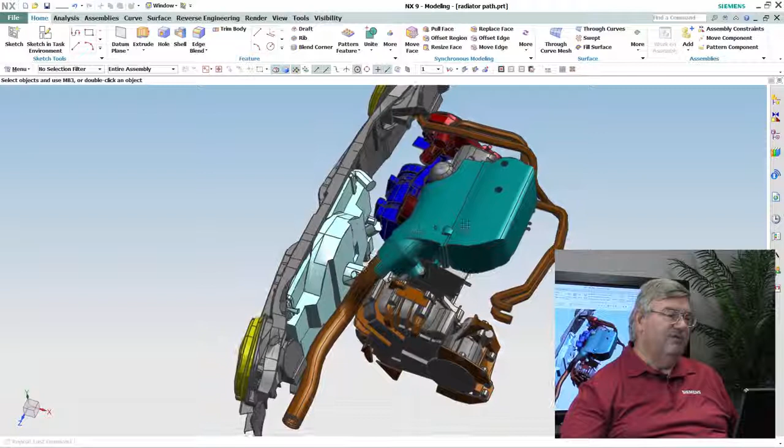Today we're going to talk about a little bit more complicated problem. What I have here is an engine compartment that we've designed, and there's a radiator in here, and we have to account for it as part of the design that eventually this car will be maintained, and one of the things that may be required is to replace the radiator. And so I want to be able to know whether I can get this radiator out of here easily.

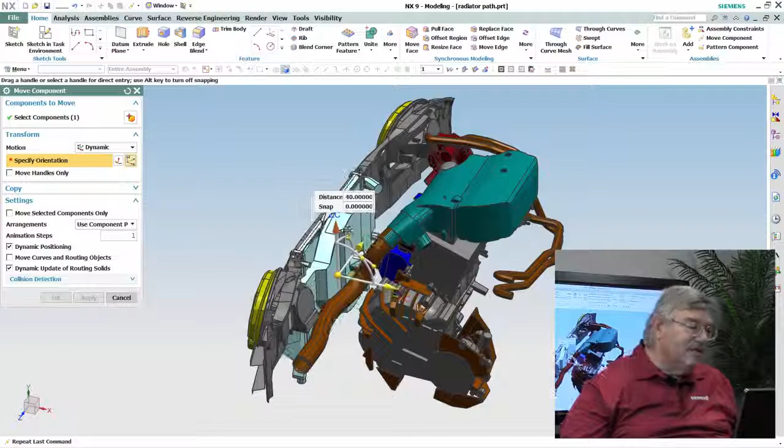So I could go in and just grab the component just like any other component and just try to. They say, well, no, look at it. It's obviously interfering there. So I'm going to try to bring it back far enough to where it's not going to interfere. Well, now it's still going to. No, this is just not going to work out.

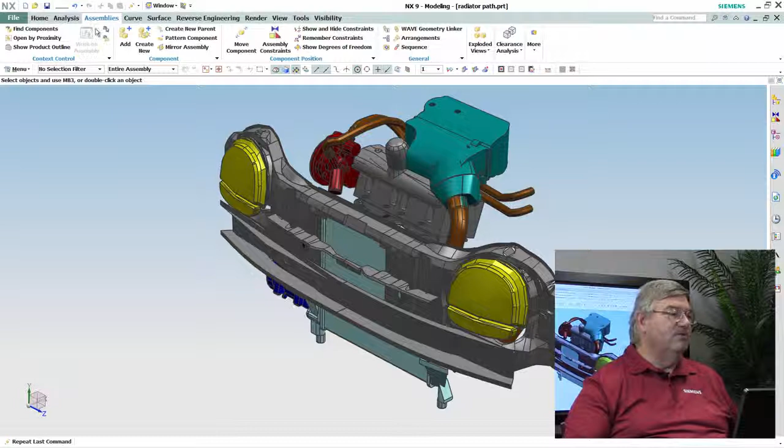So let me take advantage of a tool that we have here that will allow me to actually compute an extraction path. So I go to the assemblies module. I go into sequencing, and we're going to create a new sequence, and I'm now going to go into the extraction path function. And so we pick the object that we're going to extract, in this case the radiator, and then I grab a hold of it and I want to position where do I want the radiator to be after the extraction is completed.

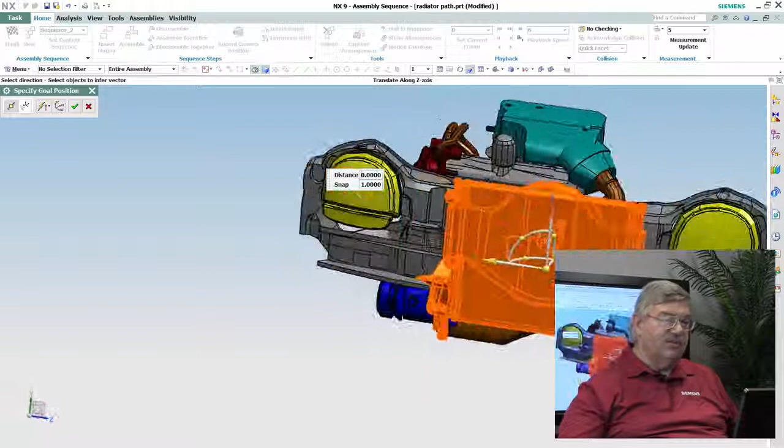So basically I'm just going to bring it out here as if it's now being held by the mechanic. So I say, okay, that's fine. So now I can say this is where it's at now, and this is where I want it to be. So I want to go from that position to here and let the system compute that.

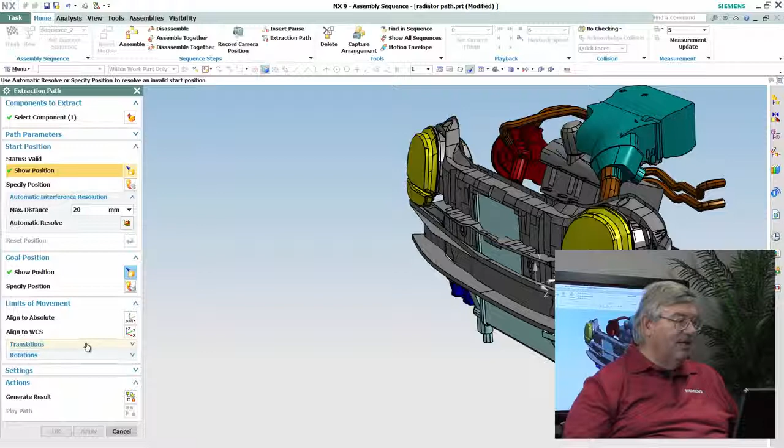Now, I could just let it go, but I want to put a restriction on here, a constraint. I don't want this to have to be put onto a lift. So I'd rather have them be able to pull the radiator out of the top. So rather than have the system think that it can get it out the bottom, which actually looks like it'd probably be the easiest route, I'm going to limit that. So I'm going to simply say, don't go out the bottom.

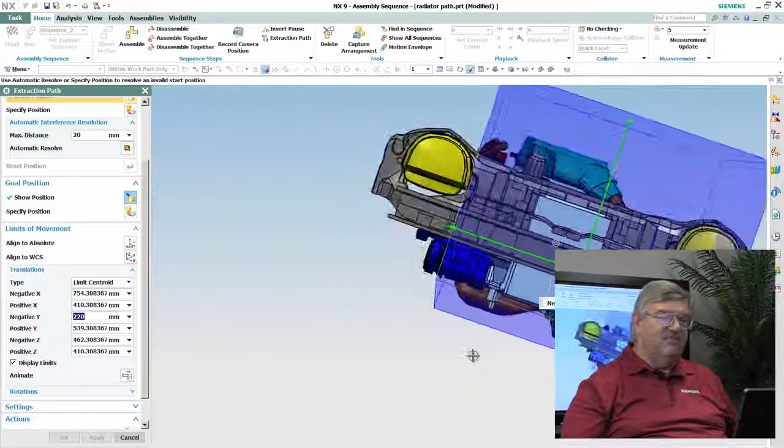So what I've done here is I've got an area of working space, and I'm going to extend the upper working space. I'm going to give them lots of room at the top, which basically means they can only really stay inside this blue box here. So, okay, we got that all set up. So let's go ahead and actually start computing the path.

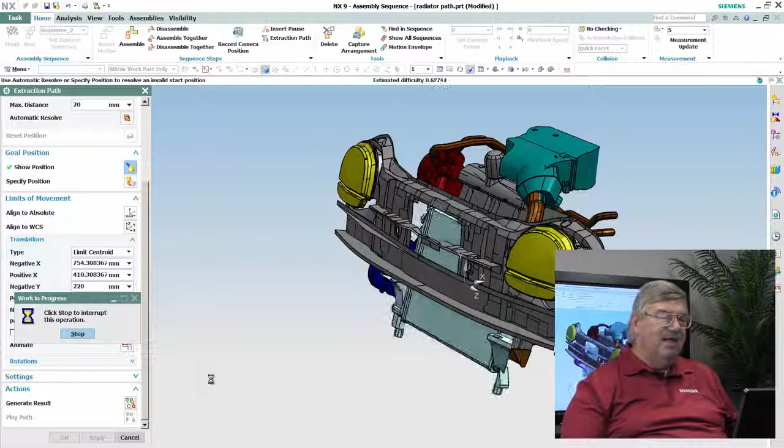So it's an iterative process. So what it's doing is trying all possible cases, and there is a clearance. See, it found a solution. So now what it's doing is it's optimizing that solution in order to get the least number of motions, the shortest possible path, and so on. So now we have our answer.

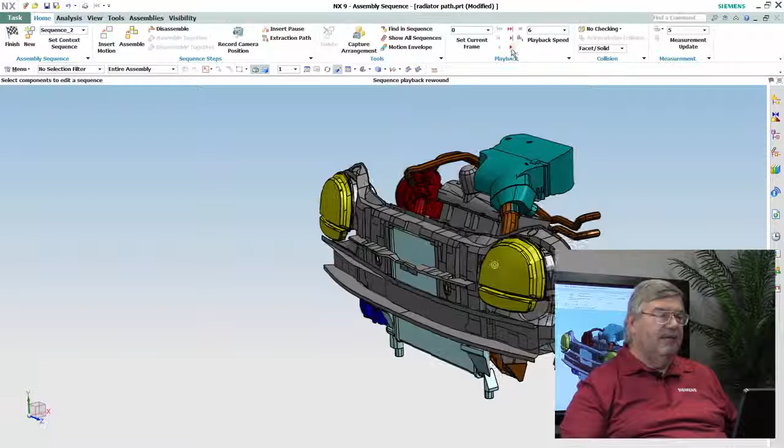Now I can play it back, and it's kind of fast. So why don't we save that sequence, and now we'll just play it back using the normal sequencing tool. So you can see how this is being pulled out, and you see it's being jockeyed around in order to miss everything, and that's kind of expected.

Of course, I can also play it backwards, and this would be how would I go about putting a radiator in here and missing everything. And so there's the sequence. So that can be played back and forth. You can use it as part of, let's say, an online instruction manual. It could be used just as a study, and so on. You can try different alterations and so on.

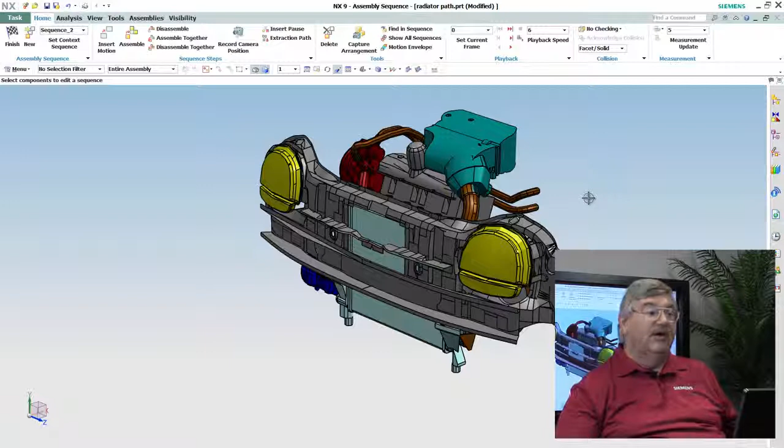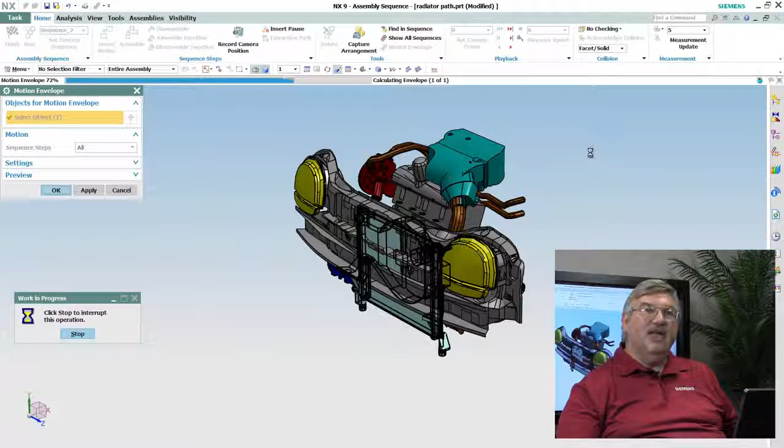But one of the things that's kind of cool here is that I can create a volume of space that actually represents where the radiator has moved, and this actually might be more useful. So I'm going to go ahead and pick this and ask the system to compute it, and what it's going to do is create a lightweight faceted body that represents the volume of air or space that the radiator actually passed through as it was being moved. And so as I play this, you can actually see that it's inside of this envelope here.

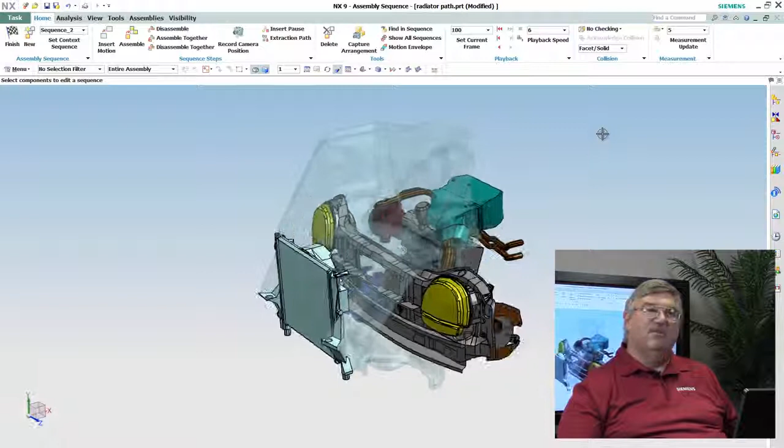Now, the value of this is that I can save this envelope, and I can save it in a separate part file, or I can save it as a component as part of this assembly. And later on, if I make a design change, or somebody has to add an additional feature maybe to the automobile, and we're going to have some more components under the hood, we don't have to go through all of this computation again.

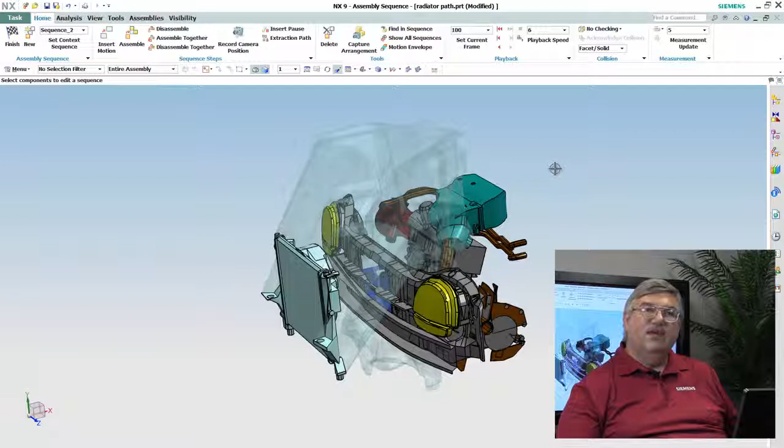I can just simply say, does it interfere with this space? Even though it's a lightweight body, I can still do clearance analysis, interference checking, and so on. And if it clears that lightweight body, then we know that it's still safe. If it does interfere with it, then we're going to have to look at the parts that are being designed and maybe make changes, or we could go back and test it and see if maybe I can still get it out. Might have to follow a slightly different path, but I still might be able to get it out.

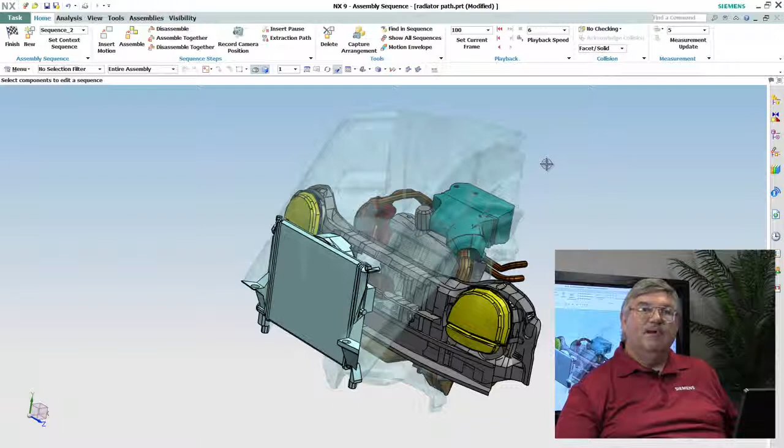But you saw how fast the tool worked, so actually that wouldn't be a problem to go back and maybe try several different things as the design progressed and as different options were added to the automobile. So anyway, that's a look at some capabilities that have been part of NX for a while, but we thought it'd be important for showing people some of the more advanced functionality that's available with NX.